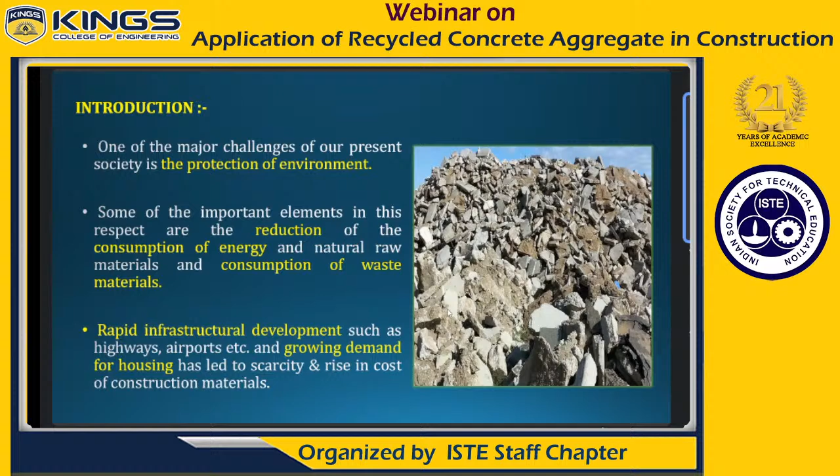Meanwhile, the segregation of wastes from the construction industry goes on increasing. In this picture, you may see wastes of concrete. They simply dump these wastes as landfill. What will be the cause of this landfill to the environment? As the concrete contains cement and many admixtures, it simply emits heat and carbon dioxide to the atmosphere, which will affect the environment hardly.

So what will happen if we go on dumping these wastes into the landfill? Obviously we are polluting the environment. So as a civil engineer, our work is not only constructing a building, but that work should be environment friendly. Now you will get an idea about why we should reuse these wastes of concrete again into the construction site.

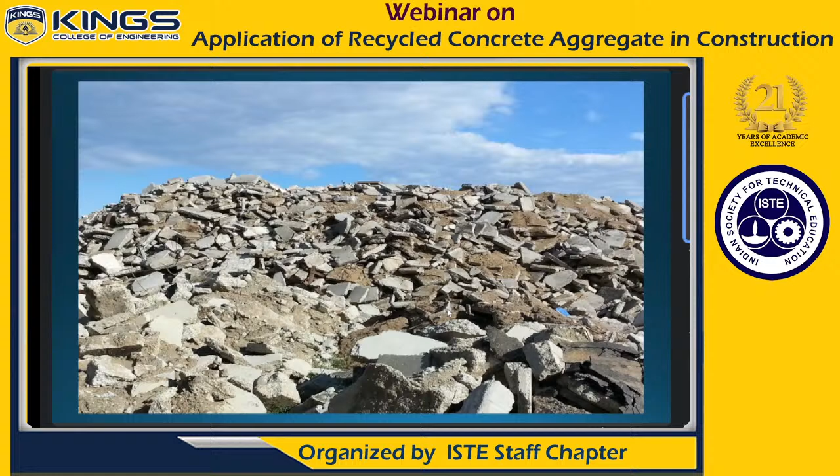So now coming to the next point - any construction activity requires many materials such as concrete, steel, brick, stone, glass, clay, mud (which is nothing but soil), wood, and so on. Apart from these materials, cement concrete usage is more in many construction industries. So to conserve the natural resources and to protect the environment, the utilization of recycled aggregate is very much essential nowadays.

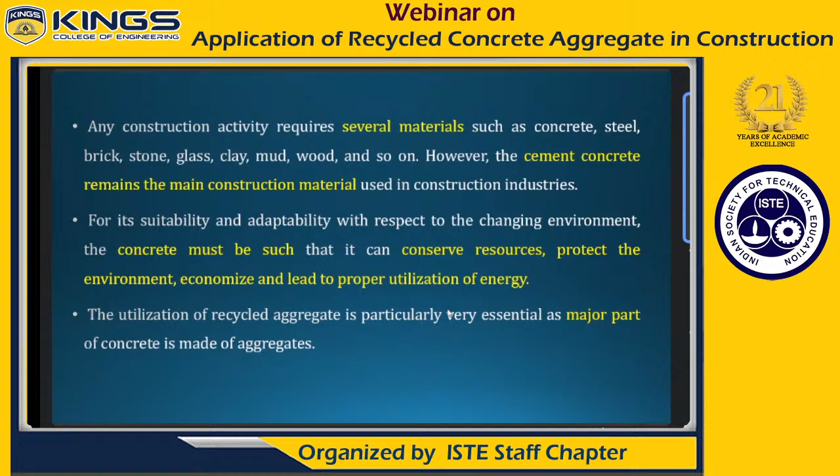As I said already, the waste comes from demolished structures or in the renovation work of old existing buildings. These demolition wastes are disposed of by simply dumping them as landfill. Therefore, it is necessary to start recycling these concrete wastes, and we have to reuse it again into construction.

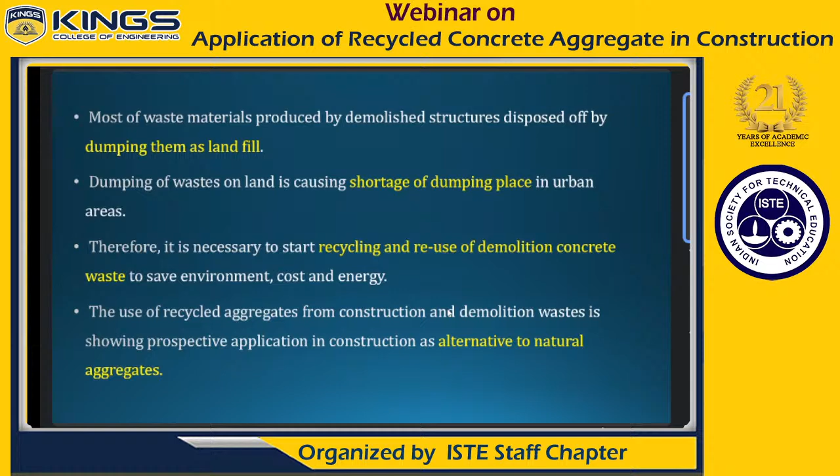Next, the sources of aggregate - these waste aggregates, where do they come from? From the demolition of old buildings, concrete pavements, even demolition of bridges, and it comes from renovation work or rework due to structural deterioration, or from old existing structures.

Even structures are turned into debris. This debris is nothing but concrete wastage that comes from natural disasters. Natural disasters mean during an earthquake, the structure can shake and fall down, and we get debris - that is concrete debris. Even in cyclones and floods also we get concrete wastes. So these are the sources of cement concrete wastes from construction sites.

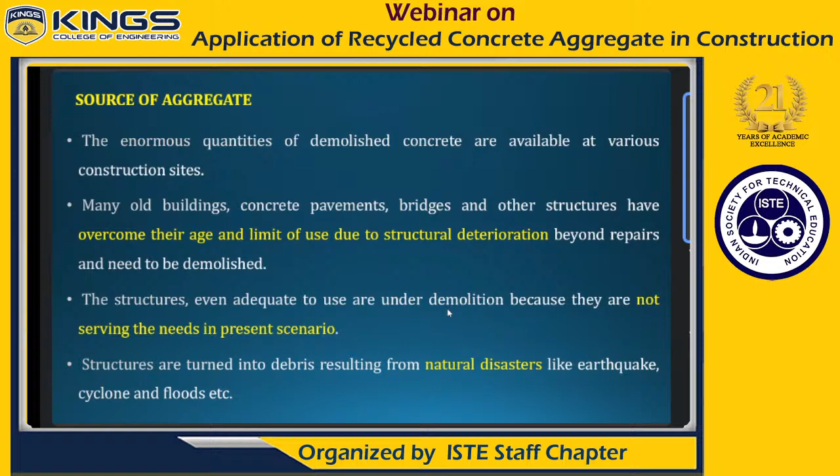Next, the procedure to obtain RCA. Here RCA is nothing but recycled concrete aggregate. So recycled concrete aggregate not only contains original aggregate but also has hydrated cement paste. So these should be recycled in specialized work.

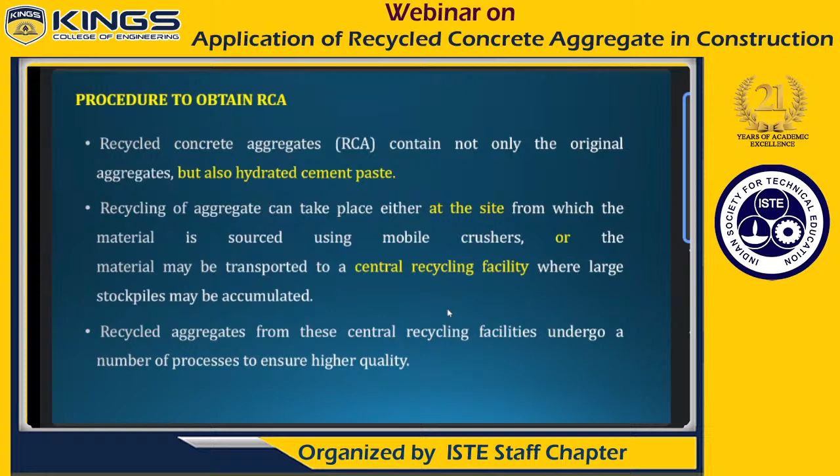So next we will see how these kinds of concrete aggregate waste can be used in construction. How it will be used, whether it can be used in a processed way or a non-processed way, depends upon our usage. In processed concrete, there will be various steps involved in the processing of aggregate wastes. That is, it may be crushing, pre-sizing, sorting, screening, contaminant elimination. So these are the processes for obtaining the recycled concrete aggregates. So this process is called recycling.

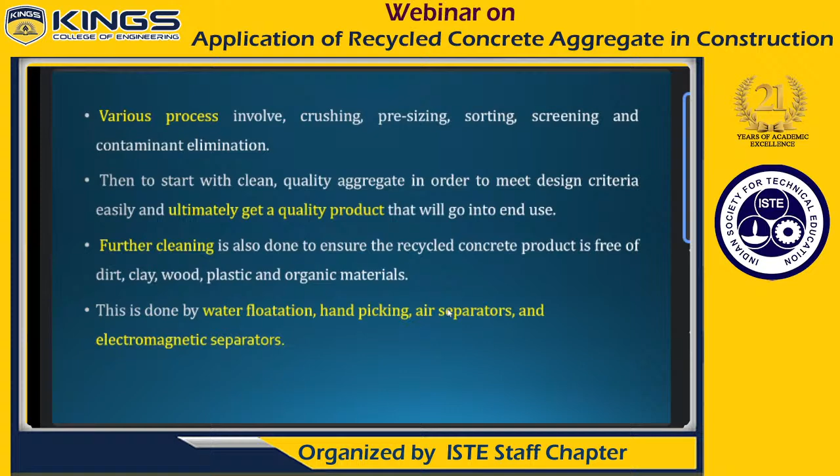Therefore, further cleaning is also done to ensure the recycled concrete is free from any dirt, wood, plastic, or any other organic materials present in the wastes. We have to clean that out before usage. Hence, obtaining recycled concrete aggregate involves these processes, that is crushing, pre-sizing, sorting, screening, and contaminant elimination.

So, next we will discuss how the manufacturing will be done for making the recycled aggregates. There will be three major steps. The first one is evaluation of source concrete. The second one is crushing of demolished concrete. The third one is removal of contaminants. So, in the first step, how we should evaluate the quality of source concrete.

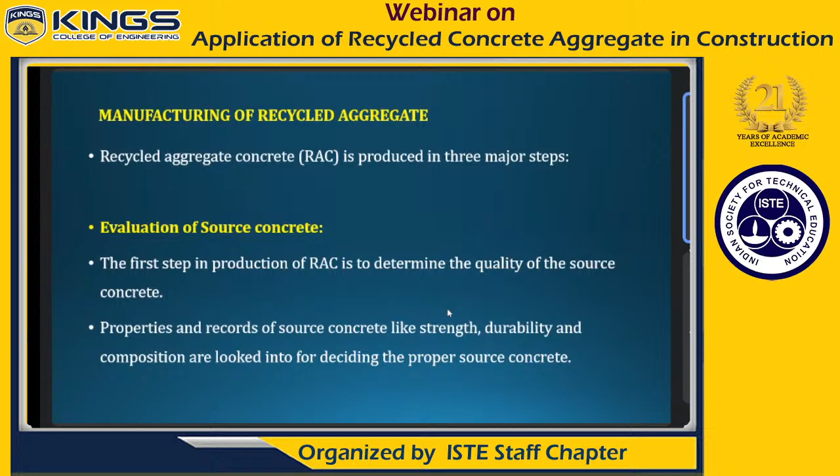Here, the quality of waste aggregate can be recorded by its properties. The properties will be evaluated simply by testing the aggregate waste. By various testing procedures, we can evaluate the properties of that particular waste. Properties means the strength of the waste concrete, durability, and composition, which will be compared with the natural aggregate. So these are all involved in step number 1.

The second step is crushing of demolished concrete. The crushing of concrete can be done by the jaw crusher or a specialized machine with a sharp blade. Here the pre-sizing and sorting of aggregates ranging from 20 mm to 50 mm can be done. This is all about the second step. Next, move on to the third one.

The third process is removal of contaminants from the waste aggregates. Contaminants means reinforcing steel, foundation materials, asphalt concrete. Asphalt concrete means the concrete with bitumen that comes from the road surface, or any other material. We should remove these from the waste aggregate before using it in construction. These contaminants can be removed either by screening, air separation, or by electromagnetic separators.

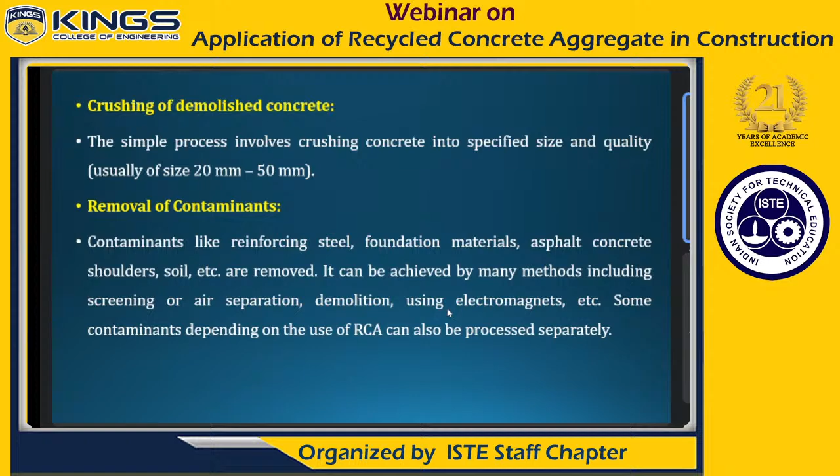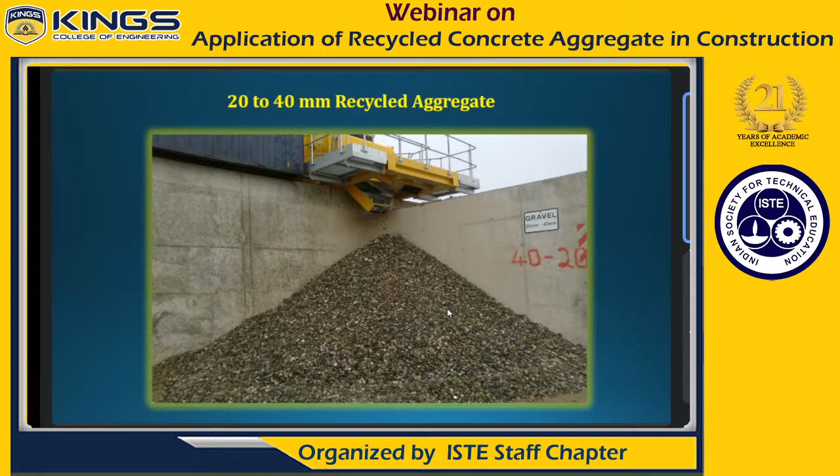Here you will see the picture of the demolished concrete block. On the right side you will see two types of aggregate attained. The first one is 4.75 mm aggregate recycled after the process. In this last picture you see less than 5 mm and over 0.15 mm, that is 0.15 mm to 5 mm aggregate attained after recycling. You may see that demolished concrete is split into different sizes after recycling.

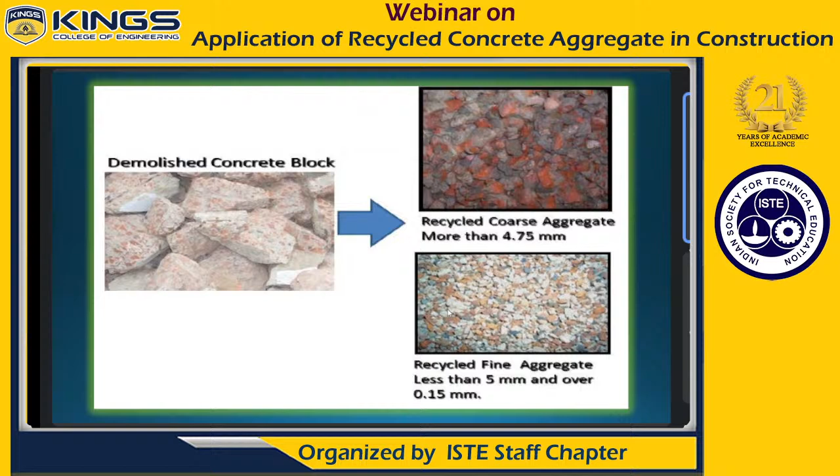So here the picture shows the process of converting concrete aggregate waste into recycled concrete aggregate, and how the concrete waste can be recycled through these steps. First of all, you should collect the wastes into this hopper. Further, it will be sent to the grizzly feeder. Next, the aggregate waste is sent to the jaw crusher, where the wastes are crushed using the sharp blade of the crusher.

Then the magnetic separators will separate the crushed aggregate by its sizes. Here the vibrating screen will separate the aggregate according to the sizes. The silty and powdery scrap will be collected in this iron scrap, and the particles over 20 mm will be collected here.

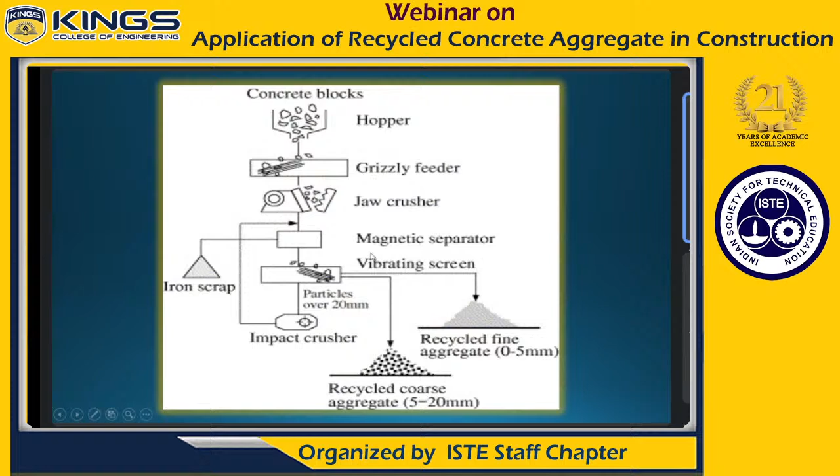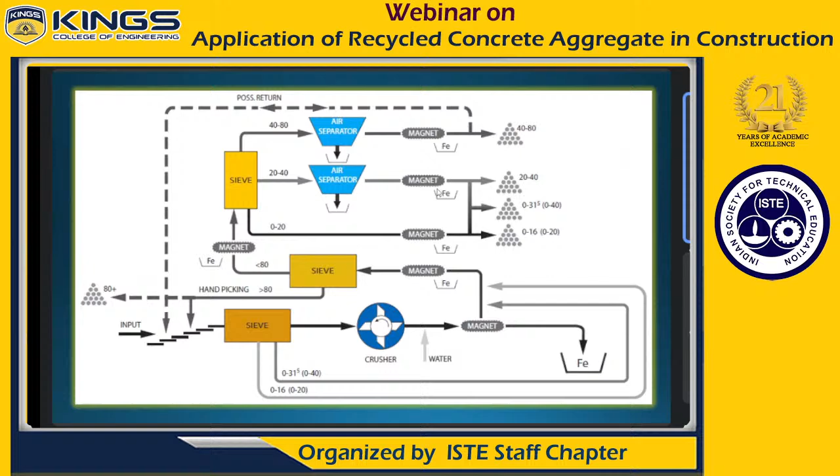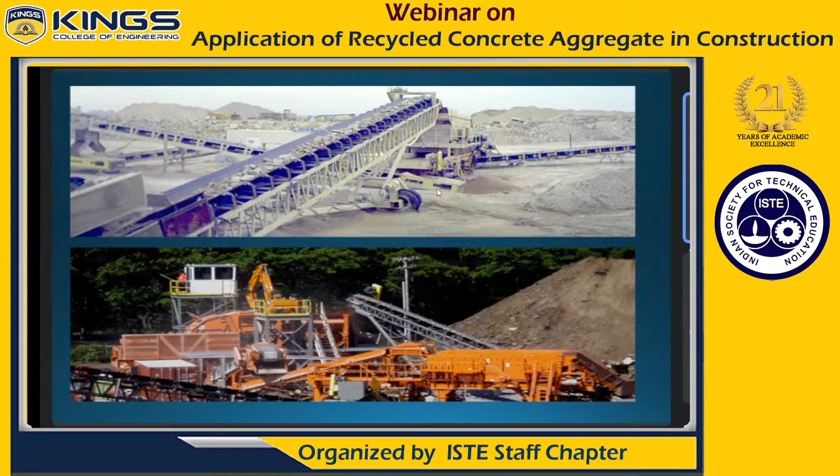So now this picture shows you the actual image of recycling large amounts of concrete waste. Here all the processes will be involved, that is crushing, pre-sizing, sorting, screening, removal of contaminants, all the processes will take place. See the next picture, it shows the specialized equipment machines for recycling the wastes of cement concrete debris.

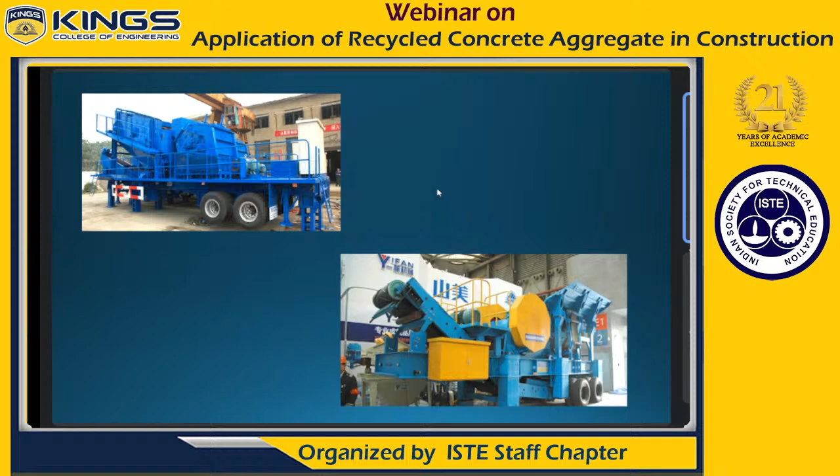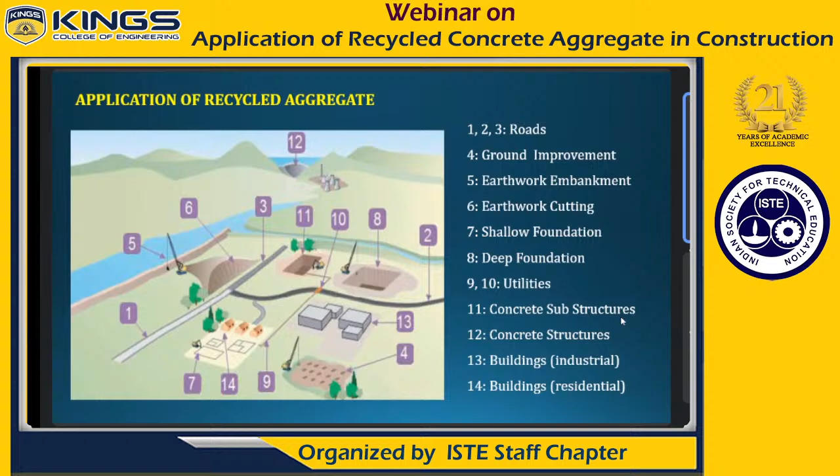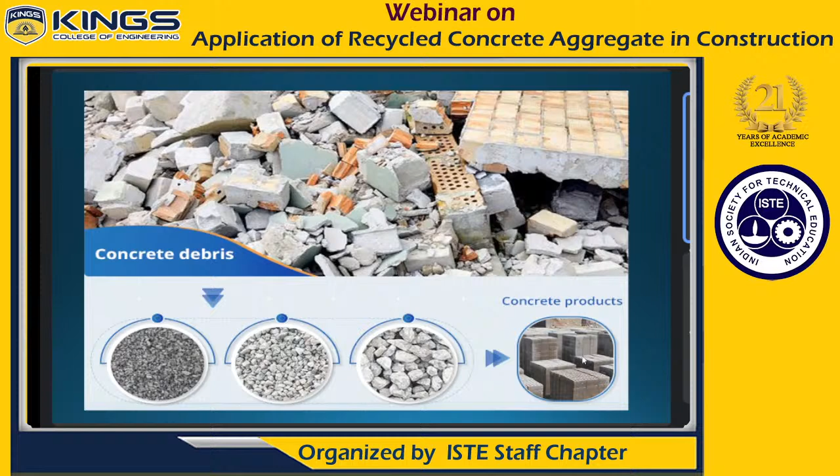So next I will show you some of the usage. So these are the applications of RCA in construction. So let me see one by one. Wherever we can use RCA in construction, we will discuss. The first, use of recycled aggregate concrete in pavement blocks and benches for community use.

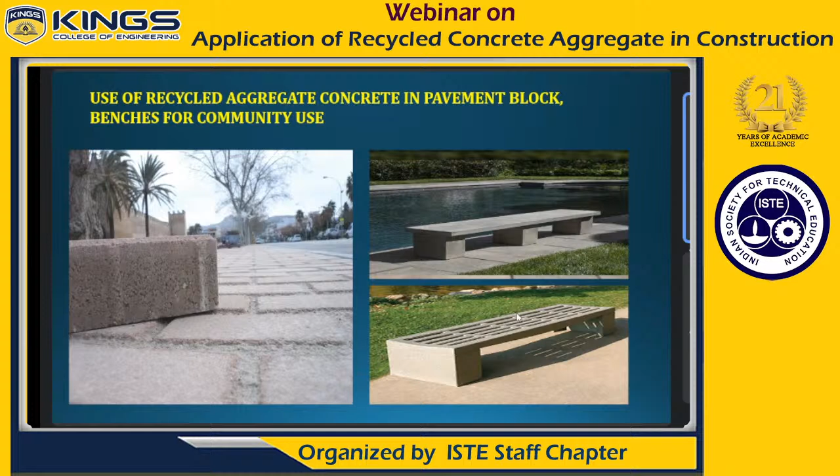So the first picture shows you the pavement block. A pavement block is a road surface. Here the second and third pictures show you benches for community usage. In the residential area, we can use these types of benches for our usage. So for the construction of these structures, instead of using natural aggregates, we will go for recycled concrete aggregate. So the first application is pavement blocks and benches for community use.

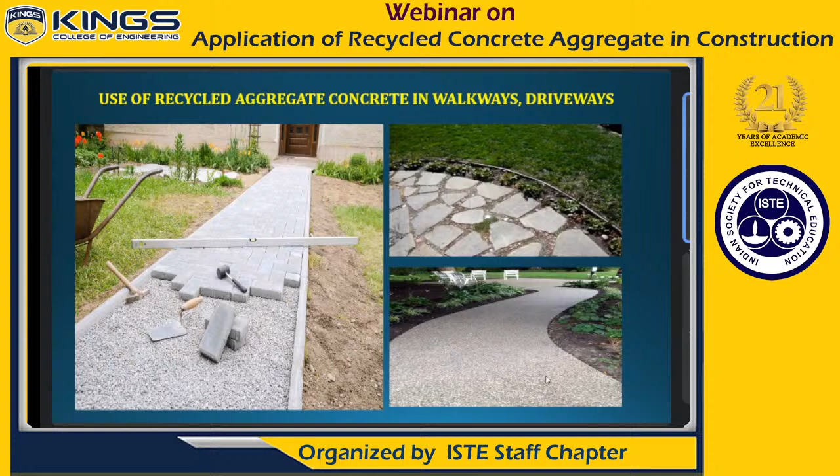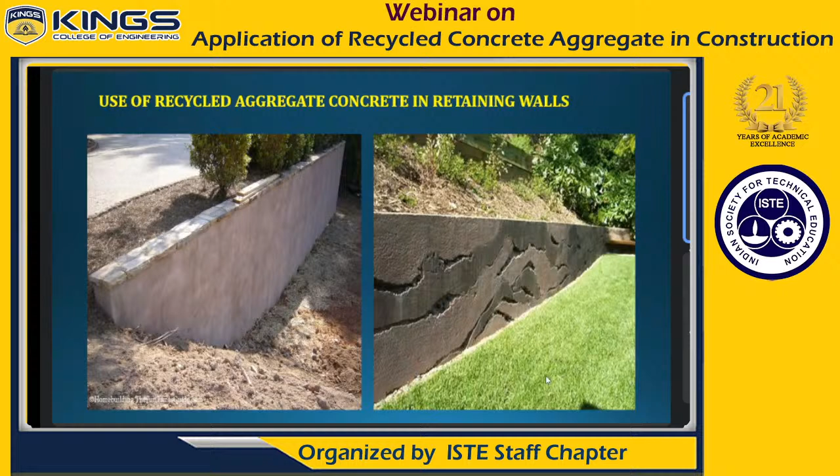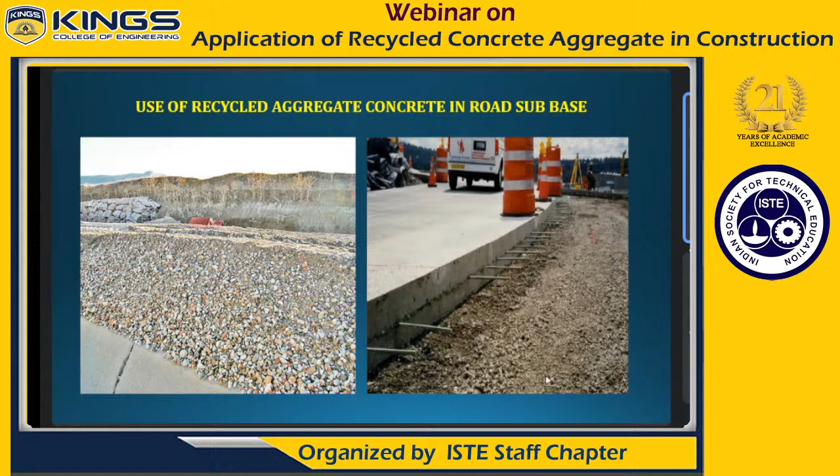So see the next picture, the use of recycled aggregate concrete in road subbase. As we know, for the construction of a road, the first step is to build a subbase. A strong subbase will keep the road in good condition. For the subbase construction, usually we lay coarse aggregate. Instead of using raw coarse aggregate, we can use this recycled concrete waste in the construction. So the picture shows how recycled aggregate concrete is used in the road construction site.

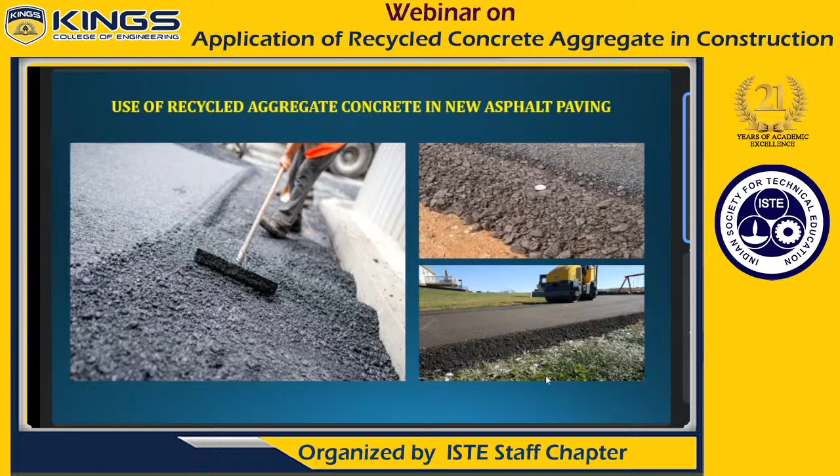So in Norway, the city of Oslo, Sorumsand area, they have constructed a new high school building. Instead of using natural aggregate, they used RCA in the construction. So it gives you a better result. They tested their building and compared it with normal concrete. The RCA building gave a much better result when compared to normal raw natural aggregates. So in Norway in 2001 they constructed a high school where the concrete fully used recycled aggregate.

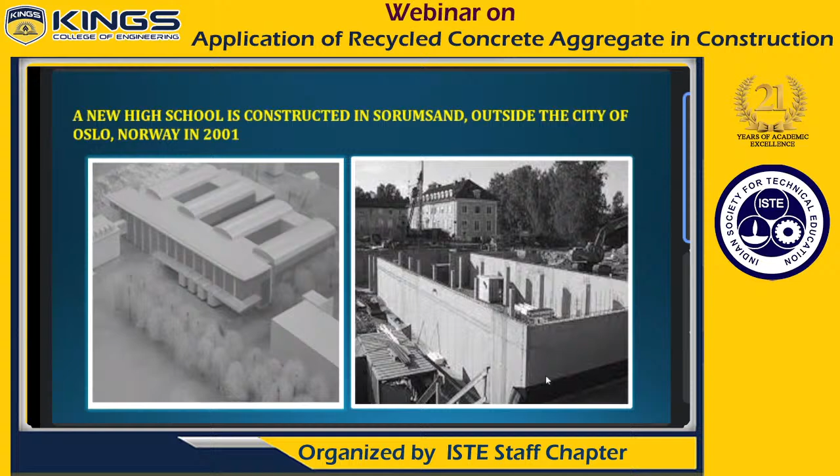So these are some of the pictures of what was constructed with RCA. So these are some of the blocks that also used recycled aggregates. So here they conducted a case study in the city of Melbourne in Australia. This building was also constructed using recycled aggregate instead of natural aggregate. The case study shows the result when compared with conventional buildings.

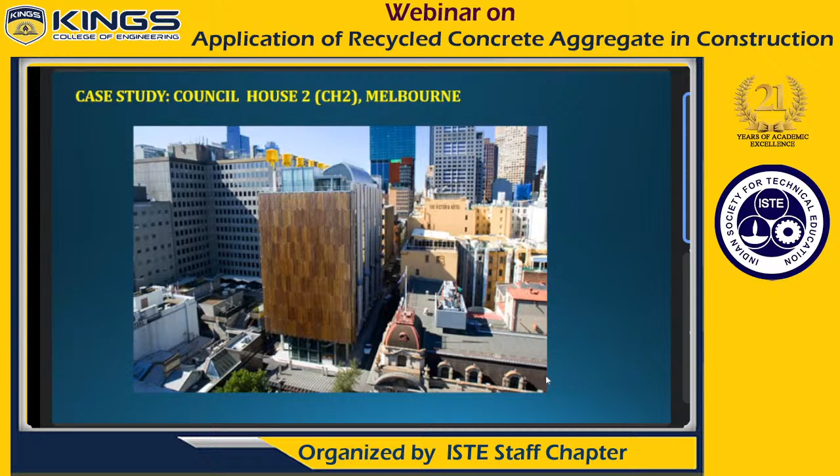So how the properties have been evaluated for testing the recycled concrete aggregates. By the research, it shows that aggregate giving 80% of strength can be used in construction. So for recycled concrete, the strength should be 80%, so that concrete will be used in construction. On the other hand, it shows if the replacement increases, the shrinkage and creep also increase because RCA has less resistance and higher cement content.

So we can evaluate the particle size, specific gravity, water absorption, compressive strength, bulk density. So these are the properties of the aggregates. So we all know that particle size distribution will be done by the sieve analysis. The result gives you the particle sizes. So it will distribute the number of sizes according to the aggregate obtained. The RCA are reduced to various sizes during the process of crushing and sieving, which gives you the particle sizes. After the test of particle size distribution, you will size according to the different ranges of the aggregate.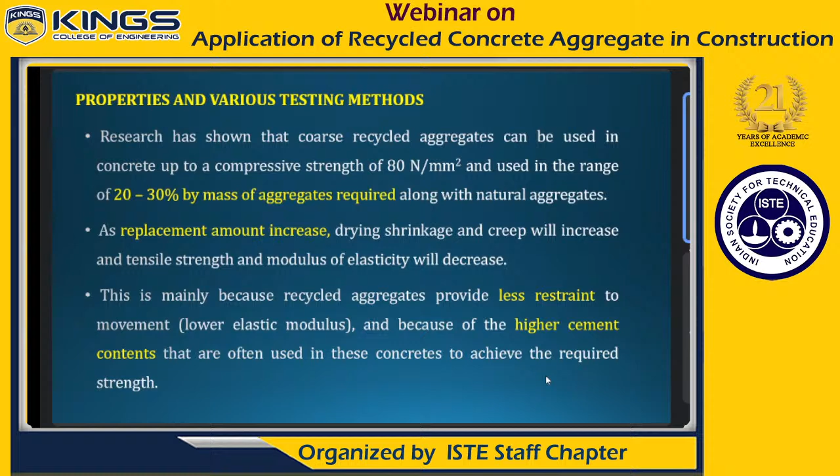So next, obstacles in use of RCA. Even though we are looking at all the good things about one particular thing, it is important to study its drawbacks also. Even though RCA has many benefits, it has some technical problems because of the weak interfacial transition zone between cement and aggregate, which leads to transverse cracks. So the high level of sulfate and chloride contents in RCA, it has some poor grading.

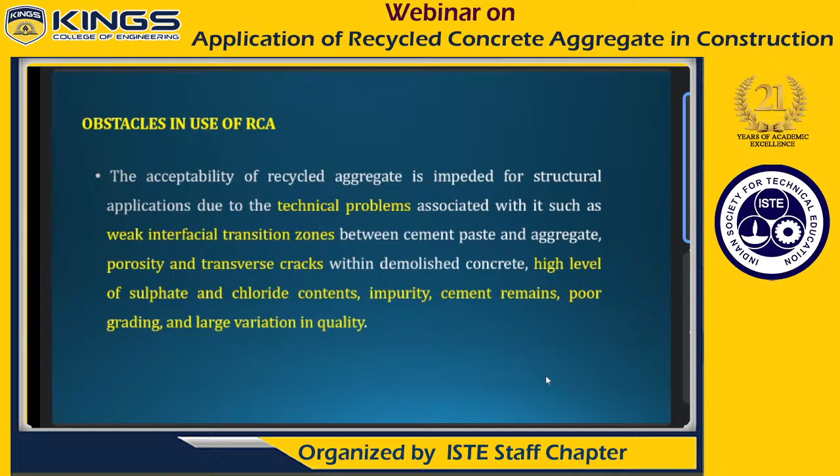The current legislation and experience are not supporting that much and encouraging the recycling of demolished waste in India. So due to the lack of awareness, guideline specification, standard specification, and lack of confidence in engineers and researchers, there will be a poor utilization of RCA in construction. So due to lack of these, we are not using that much recycled aggregate in construction in our country. So we should get aware of these recycled aggregates for the better improvement of the environment.

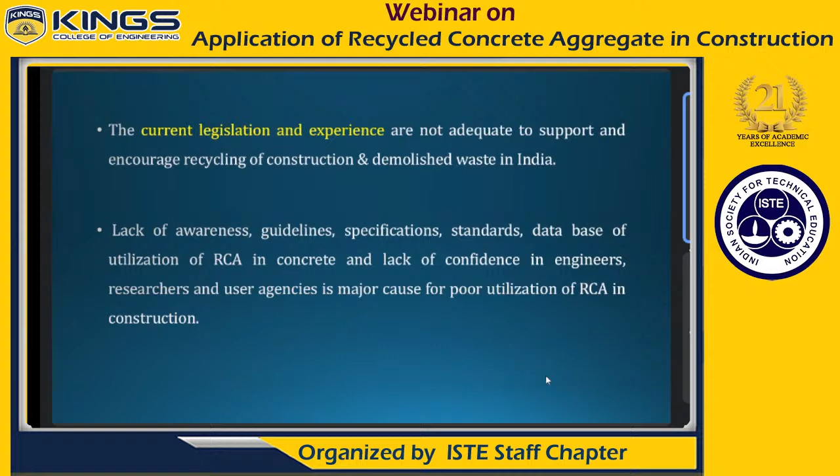So even though we are looking at all the good things in recycled concrete aggregate, it is also important to study its drawbacks. So these are the drawbacks. The main thing is the lack of awareness and standard specification, and lack of confidence in the engineers are the main things for the less utilization of these recycled aggregates in our country.

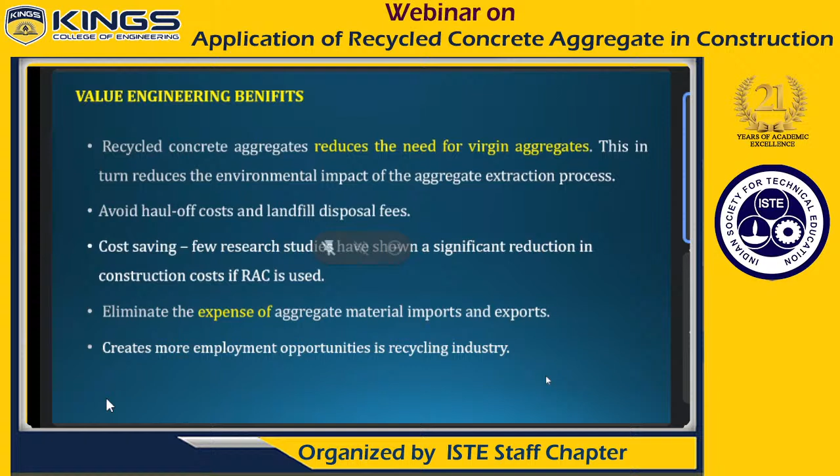So next, the main thing is cost saving. A few research studies have shown a significant reduction in construction cost if RAC is used. Whether you are using recycled concrete aggregate, yes, we are saving our cost. And not only these advantages, we also have one big thing: it creates more employment opportunities in the recycling industry. So recycling has many processes that we have seen already. So in that recycling industry, we have more employment opportunities. So these are the benefits of recycled concrete aggregate.

So that's all about RCA, that is recycled concrete aggregate. Hope you will understand the importance of recycling and reusing the concrete waste again in construction, and also we will see the applications wherever we can use these recycled concrete wastes in a good manner in our construction. So it has many benefits. So hope the future will go for recycled concrete aggregate by replacing the raw virgin natural aggregates.